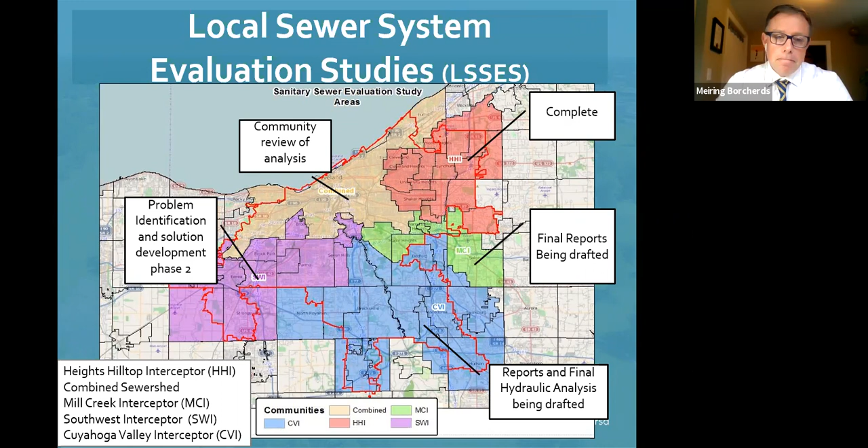Then an update on our member community infrastructure program funds. In 2020, as we have seen with COVID-19, and Frank Greenland mentioned earlier, we have seen about a $40 to $50 million reduction in our wastewater program. The member community infrastructure program is funded out of the wastewater program, and that is why we unfortunately had to reduce the available funds for the 2021 program to $2.5 million. Out of the $2.5 million, we were able to select the top 7 projects that submitted.

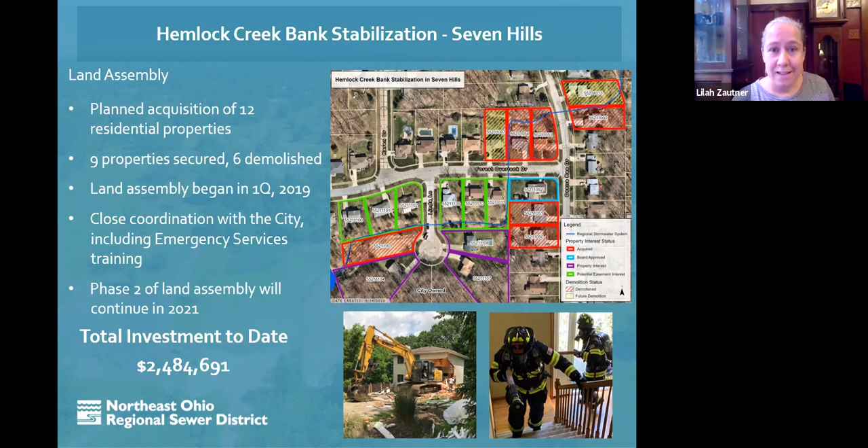So we have concluded phase 1 of land assembly. So we will be looking to start our design on phase 1, and then we'll be considering phase 2 for land assembly going forward. To date, our total investment has been around $2.4 million. We do expect by the time we are finished that the investment in property acquisition will be somewhere around $3.1 million. Thank you, and I will go ahead and pass it on to Paul.

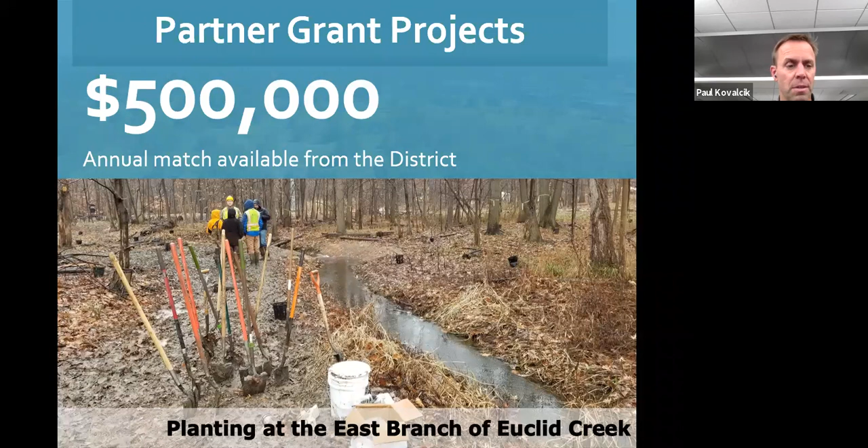For 2021, we want to formalize this process for distributing matching funds for grants. For 2021 and beyond, we've designated $500,000 in matching stormwater funds available for grant-funded projects. Next slide, please. We'd like people to keep their requests to under $300,000 for individual projects.

And what we'd like to see from you is a good project summary with some anticipated outcomes, a cost estimate with some line items and unit costs with the total cost, a concept graphic showing the work area, and hopefully this is along the regional stormwater system, of course, the dollar amount you're requesting from the district.

As an alternative, you could use a project summary sheet from an existing 9-element plan for a non-point source implementation as a template, but we'd like to see a little more detail in the project description. As some of you know, this is required for 319 funding. And then email it to me.

We'd like to receive all partner grant applications by the end of 2020. And what we will do is we will nominate each one to our stormwater construction plan and rank them among themselves. Funding will be distributed according to rank, and we can be available to assist with developing concepts, sediment nutrient budget, cost estimates, things that you would need for your project.

We may provide in-kind services even if district funds are not awarded. And of course, projects must include design and construction that result in improvements to the regional stormwater system. And I will state more directly that this is for using stormwater dollars to leverage outside grant funding. It is not designated for funding projects outright.

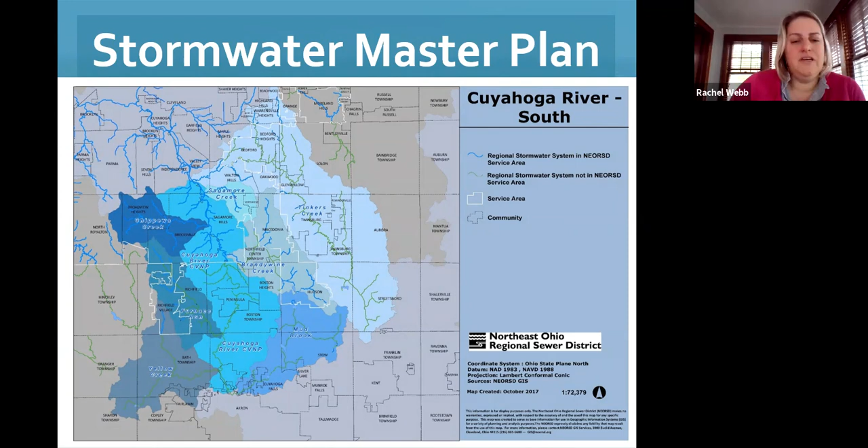Good afternoon, thank you. So Rachel Webb, I'm a senior project manager, and I've been working now for the last, I would say, 2 years on the stormwater master plan, the Cuyahoga River South and Cuyahoga River North. So there is some status update on those master plans.

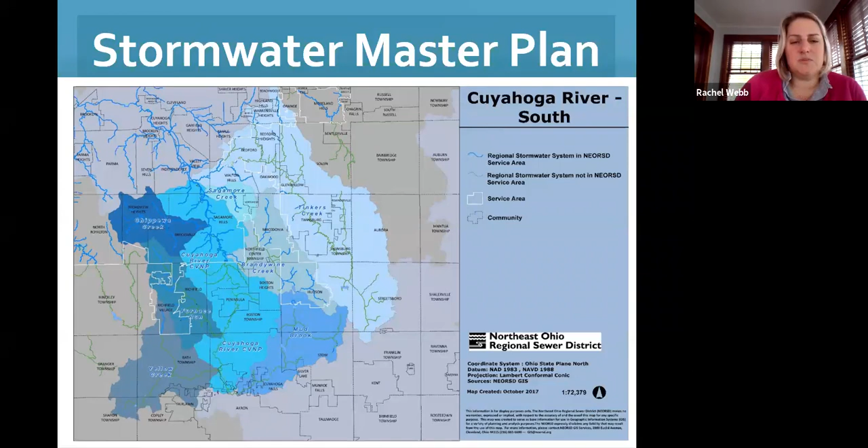So the South, as you all have been aware, has been complete now for some time. The North is now complete as well. It was the second to have started. The Rocky River is on trajectory to be completed this November. And that leaves the Chagrin River Lake Erie Direct Tributaries Master Plan, which will continue through May of 2021.

With that being said, the Cuyahoga River South Master Plan was the first done. You have heard me talk about this now from the very beginning. This is a little bit of a repeat. So slowly start to transition out of master plans and into stormwater design and construction for the projects identified.

There were over 80 projects or problem areas, excuse me, that we've identified. All now have been nominated to the stormwater construction plan. In total, they were about $195 million in project costs. So with that being said, in terms of the nomination, there is a schedule of prioritization that occurs with that. So that is all taken into consideration every year as we review the stormwater construction plan. But just for this plan, all of that has been nominated.

And that really is focusing on those system enhancement recommendations. So those regional stormwater problem areas, flooding, erosion, that fall under district responsibility. And we have, in that construction plan, prioritized, scheduled, identified for property acquisition, and/or we have some areas where we want to do some advanced stormwater planning.

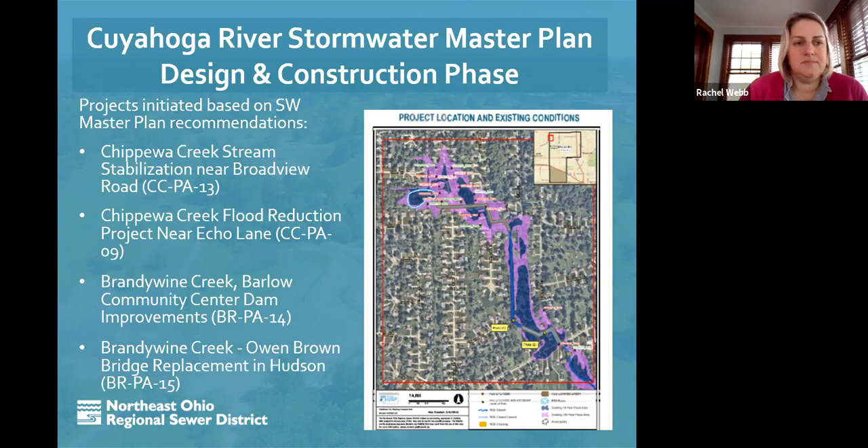With that being said, as I mentioned, there were some additional recommendations for advanced stormwater planning. These were problem areas that had complex projects and complex components. The cost of the recommendations exceeded what we could implement within a specific outline of a budget. So we have some that are upwards of 12, 13, 20 million.

And so we need to look at those and potentially break them into smaller projects to move into design and construction. And then problem areas or projects that require a bit more information to understand the full impacts of those recommendations. At the moment, we do not have any advanced planning started for Cuyahoga River South, but you will likely see some as we move further down the line with this project. So just generally there's a lot of information that was generated with these master plans and will be generated with advanced planning.

If you as a community are interested in any of this information, you have your own projects that you're looking at, and you would like access to any of this information, please contact us. We want it to have the most benefit that we can have with making access to this data. So there's CCTV, PACP reports, there's spherical imagery. This was one area that was done under a different master plan contract. It did not start off with the Cuyahoga River South contracts. You may not be as familiar.

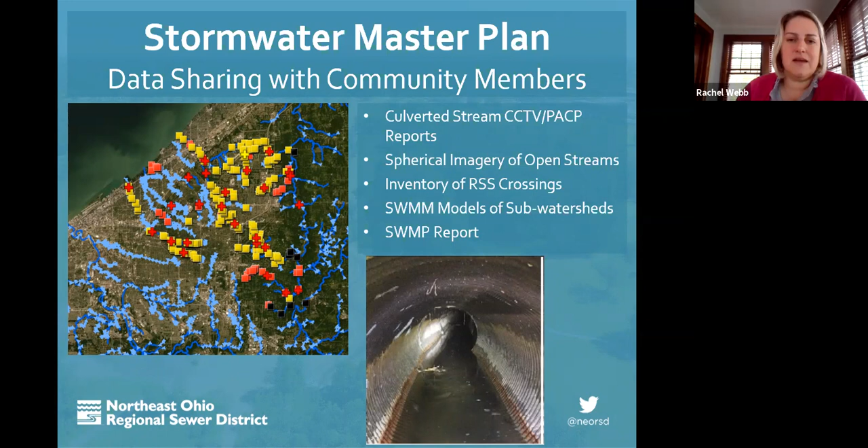There is the full report that can be made available as requested. It's quite large. So I say as requested because it's not something you can simply email, but we are able to provide access to it if you are interested in it. With that, that is all I have really for stormwater master planning and advanced planning at this time. If there are any questions, I'm happy to take them.

Rachel, I do not see any questions at this time. Okay, well, with that, I'm going to transition this over to Christina with stormwater inspection and maintenance. And she is going to go over, I think, the very interesting Labor Day stormwater event.

All right, thanks, Rachel. I'm Christina Silea. I'm a stormwater inspector in our inspection and maintenance group. And I'll go over a few things today: what the SWIM group has been up to this year, our inspection program and maintenance program, talk about culverted stream inspections, and the Labor Day storm event.

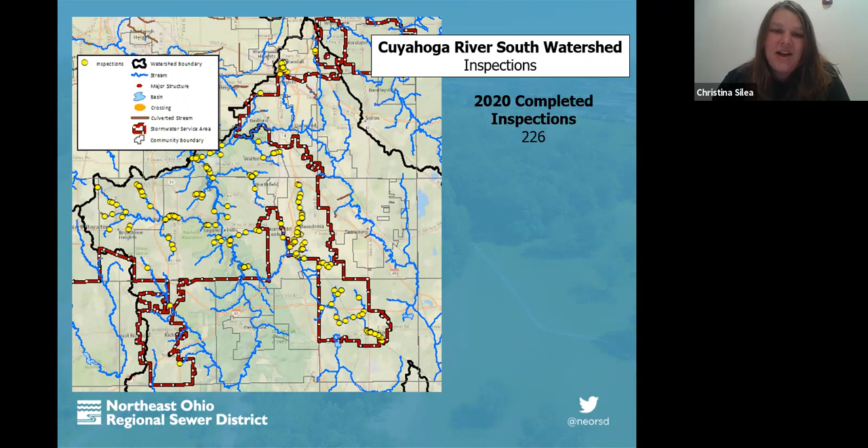All right. So far this year in the Cuyahoga River South alone, we've performed 226 inspections. Those are identified by those yellow dots. So we can see we've been all over the area. And these green dots identify our other responsible party assets. So these are crossings that are inspected and maintained by another agency. And there will be inspection reports available for these that we can utilize. Those agencies could be the railroad, ODOT, the Cuyahoga County, Turnpike, or the Metro Parks.

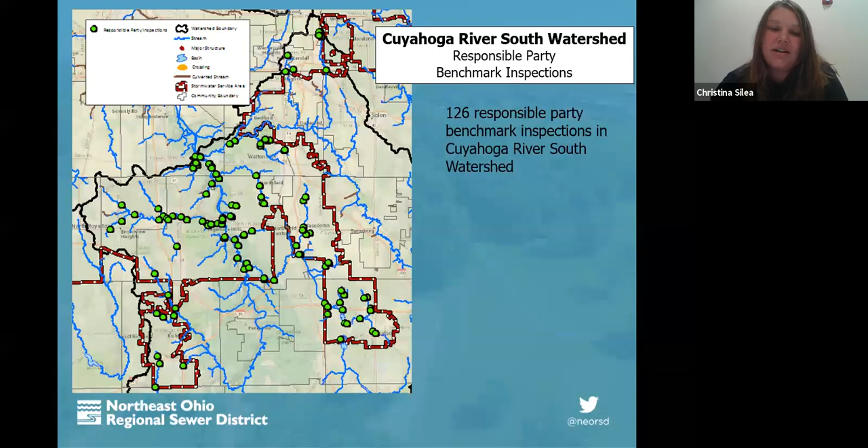Going into our maintenance program, so far this year, we have performed 28 maintenance tasks in the Cuyahoga River South. We've removed 394 cubic yards of debris and a little over 1,200 cubic yards of sediment. We have also performed 5 other projects. That includes 3 small-scale stream bank stabilizations, one on Bear Creek, one on Brandywine, and one on Indian Creek. And it also includes repairing some vault doors on a tributary to the Cuyahoga in Brecksville that got damaged after a storm event in March.

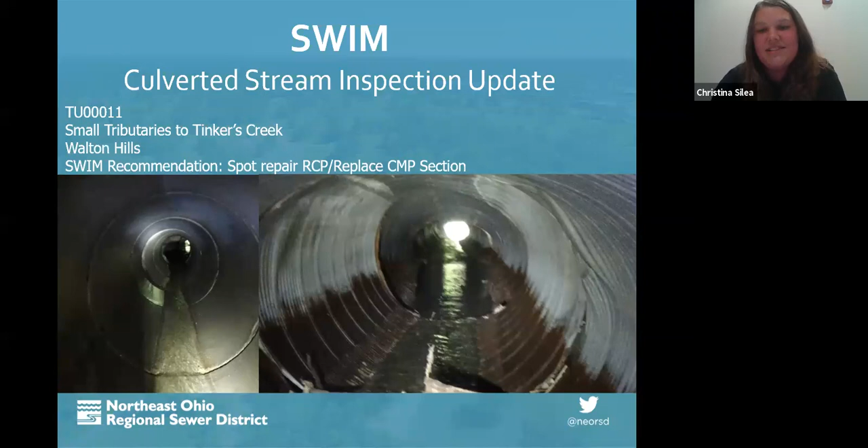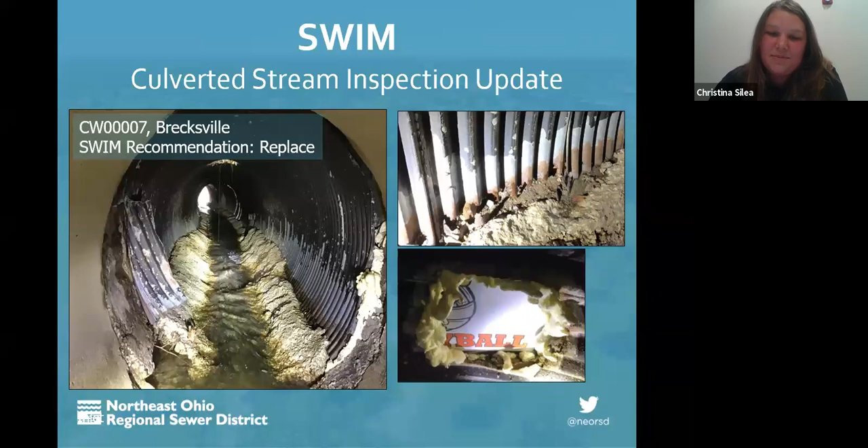Just overall, a lot of really significant structural issues through this pipe. So it's likely beyond its service life. It's probably going to need replaced. It is located within an area that has a lot of flooding, so it may require, like Rachel said, some advanced planning in this area just based on the widespread flooding and erosion issues in that area.

All right, on to our big Labor Day storm event. So overall, it was a service area wide event. But depending on where you were, you may have seen a little less than an inch to 4.55 inches over a 6-hour period. So we didn't have a lot of rainfall over that short duration. It was really spread out. On average, that came out to about a 25-year interval, but in some areas that was a little bit less than a 200-year interval.

So then breaking it down into the 1 hour frequency, about 0.76 to 1.67 inches was the range. So over the 1 hour, a little bit less than the 10-year was the maximum rate that we got to, on average, about a 2-year. And then breaking it down to the 15-minute interval, the maximum was a little bit less than a 5-year recurrence.

So on the Labor Day event, Big Creek was the only river to reach that major flood stage based on the USGS stream gauges. The Cuyahoga River in Independence and Mill Creek in Garfield Parkway reached the moderate flood stage, and no other USGS gauges reported reaching a flood stage.

Sorry, could you go back one more? Sorry.

The Labor Day event was the 4th highest recorded event based on those stream gauges in recorded history. And the September, May, and March 2020 events were all within the top 10 highest on record as well. So we have seen a lot of significant events this year.

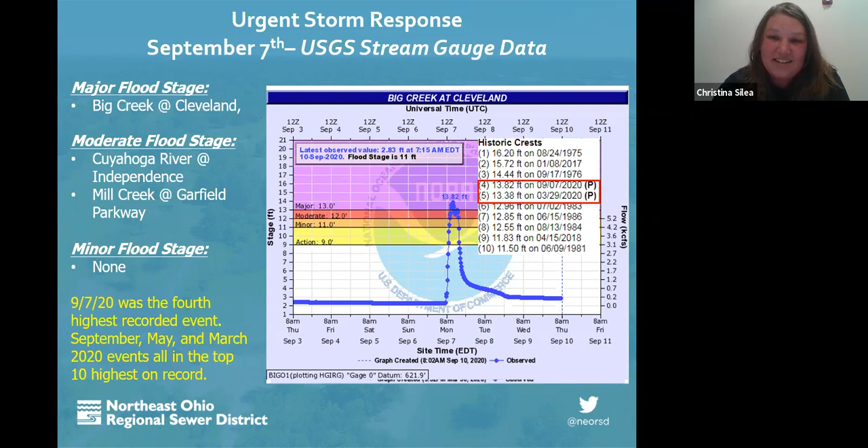So during that Labor Day event, we completed 90 observation inspections. So we went and observed 90 locations to see how they were responding to the event. There were 29 maintenance work orders made of those 90 observations, and that resulted in about 812 cubic yards of debris removed at a cost of about $86,000. And we also received about 18 customer calls that we responded to.

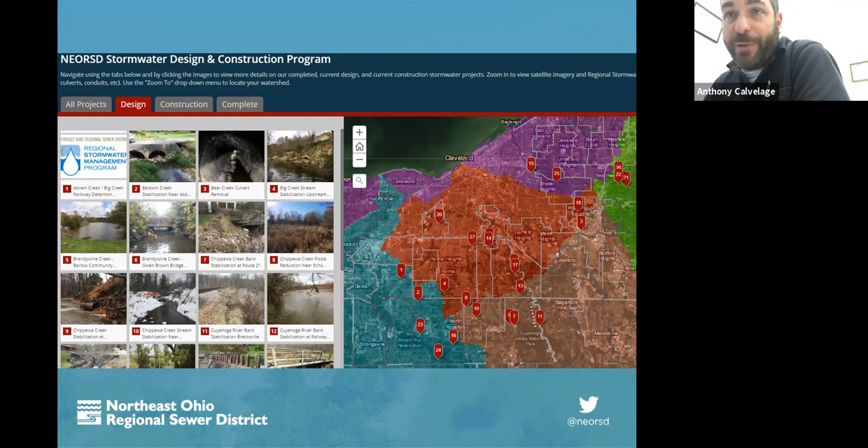So a very successful project, acquiring a lot of floodplain access and also moving critical sanitary sewer infrastructure out of the stream flow path, which would mitigate any water quality problems we'd have associated with that sanitary sewer.

Project currently in the design phase, recently bid. This is Pepper Luce Creek at Lander Road. This is in the city of Pepper Pike. Got a lot of erosion problems that need taken care of. We've got some public utilities within the stream's path. I think we have septic systems out there also. We got some failed gabion baskets. So this is a great project.

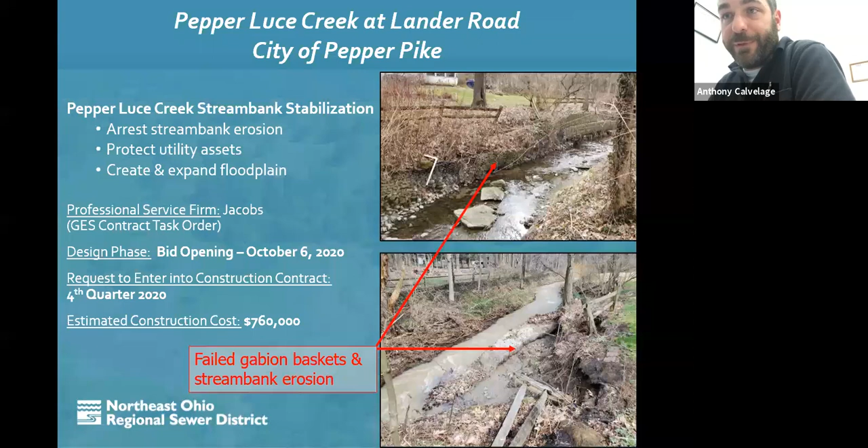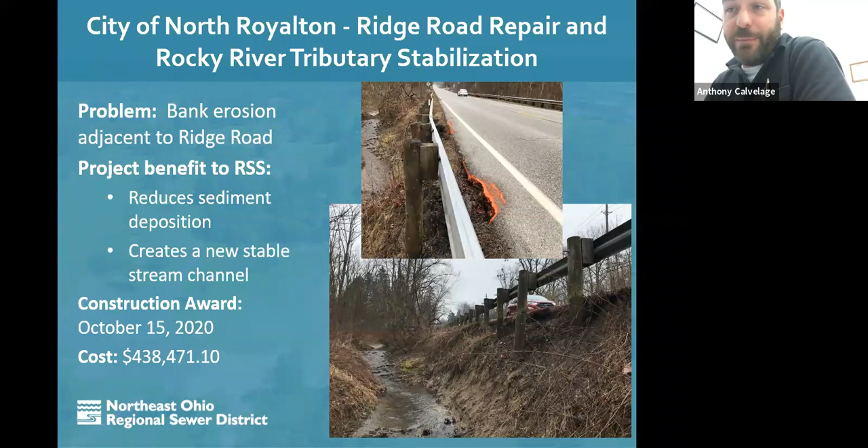The orange spray paint you also see on the road is actual deterioration of the roadway surface, sectional loss starting because of erosion due to that tributary moving so close to the road. A typical fix for something like this would be to hard armor this bank. And if we take a look at our next slide, we'll see our intended approach is not hard armoring. It's actually to move the stream away from the road.

This is a technique to create green space in between the two, give it a little breathing room per se, let it access some more floodplain so it's not eroding so horribly, and it won't undermine that road if we can do that. We're going to use a lot of natural methods here, including toe wood, which should induce sedimentation along the bank next to the road and protect that roadway in perpetuity.

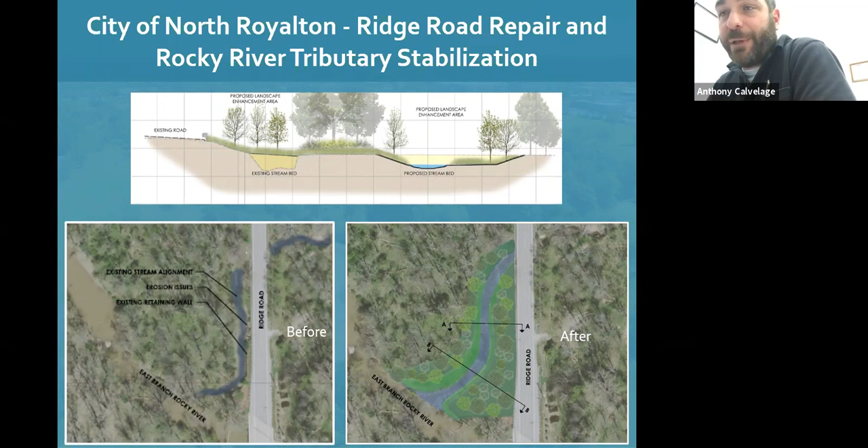Another project in design, this is Chippewa Creek near Broadview Road, city of Broadview Heights. It's similar to some of our other projects. It's going to be a stream restoration project. We're going to stabilize banks through here using naturalized methods. We've got a threatened sanitary sewer. We've also got a failed gabion basket retaining wall. We see a lot of those throughout the district. So we're going to try to arrest this erosion here.

Another component to this project will be creating floodplains. Same principle, right? We're going to try to create floodplains and take the peak off the hydrograph. Try to mitigate some of the downstream effects.

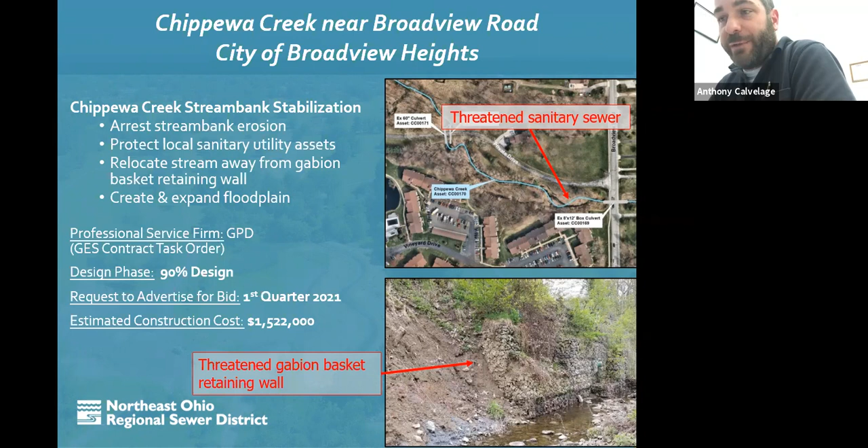Here we have Big Creek Upper Ridgewood Basin modifications in the city of Parma. This is a city-owned basin. We're doing some planning here to see how this basin can benefit the regional system by increasing its storage. This is the same topic of discussion, increasing storage, keeping water from going downstream too quickly, to try to mitigate those downstream impacts that the high flows are having, and try to keep them back a little bit so that you can flatten the curve of the hydrograph.

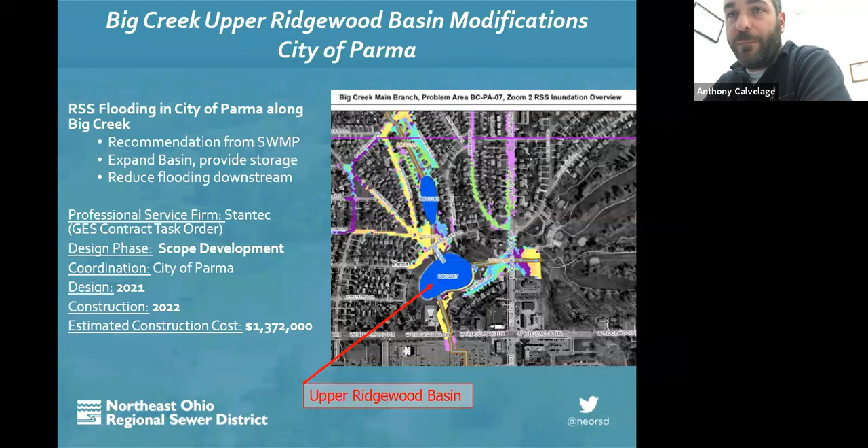This is a project that's currently in construction. We're nearing the end of construction. On the top of this bank is a nursing facility. This is on West Creek in the city of Parma. This nursing facility was threatened by erosion, and we had some of the infrastructure falling into the stream. West Creek in this section of Parma is very channelized and surrounded by a metropolitan area, very built up area. There's not a lot of opportunity to acquire floodplains in this area.

So when we don't have the opportunity, we do hard armor a bank, and this is what this is. It's a retaining wall, soldier pile, and concrete lagging. There's also a 5 foot by 5 foot by 5 foot boulder toe detail for this wall. So it's a robust wall that will continue to protect this community and their infrastructure, so the stream and the nursing facility may live next to each other.

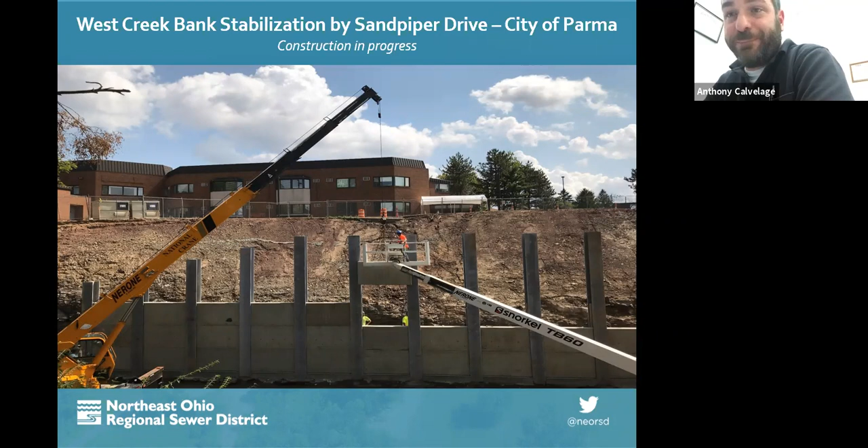So we went back to our board and we decided to go up into the culvert and remove 450 cubic yards of material that were blocking the culvert. We finished that project. Everything was good. The master plans came back saying that there's more debris in this culvert. And you couldn't see it. It was 1,500 lineal feet upstream next to Euclid Avenue. So that's this project specifically, to go into this culvert and remove another 700 cubic yards of debris.

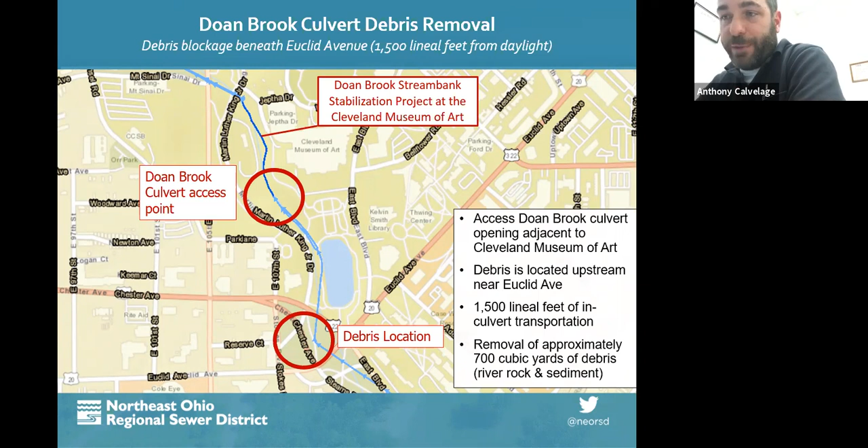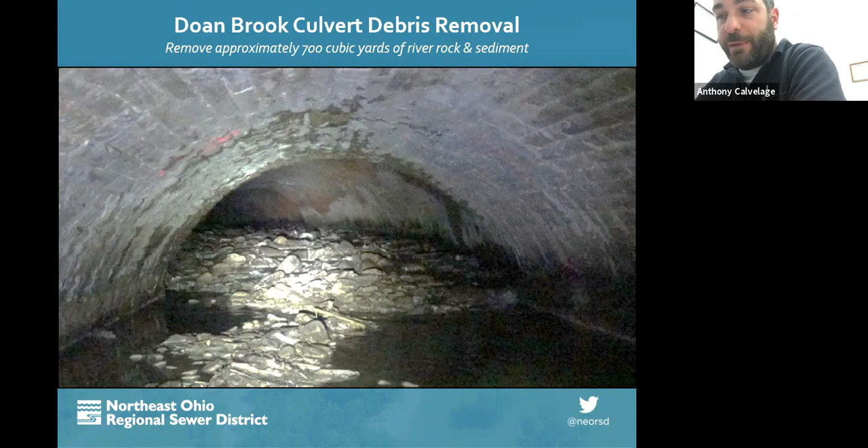The master plans also concluded that removing this debris would take this culvert from a 2-year level of service and return it to its 10-year level of service it was designed for. So it's going to be a major improvement. Hopefully we see some positive impacts in that University Circle community with regards to flooding and the like.